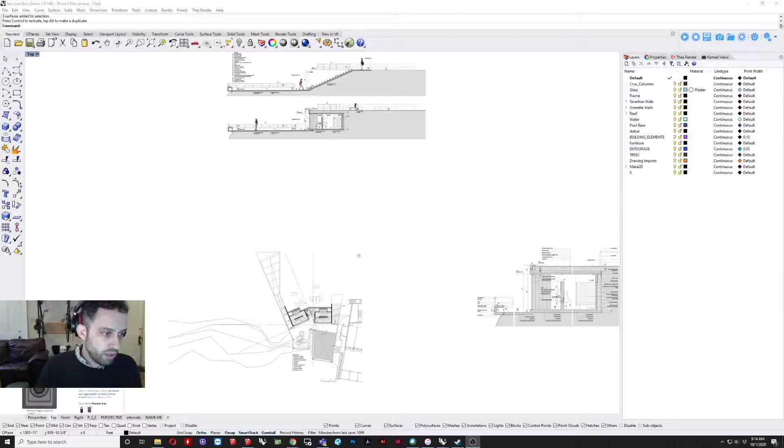So on this one, I'm going to be covering the Baños Públicos project. This is kind of an unscripted thing - I'm just going to go through from just bringing in the drawings to how I would get to starting the process, and try to cover in a little bit more detail each of the things I'd be looking for.

So these drawings are just simply dragged in at this point. They have not been scaled, so the first thing I'm going to do is find the scale on the drawing and use that as a reference. I know that's 5 meters, so we'll scale that one appropriately.

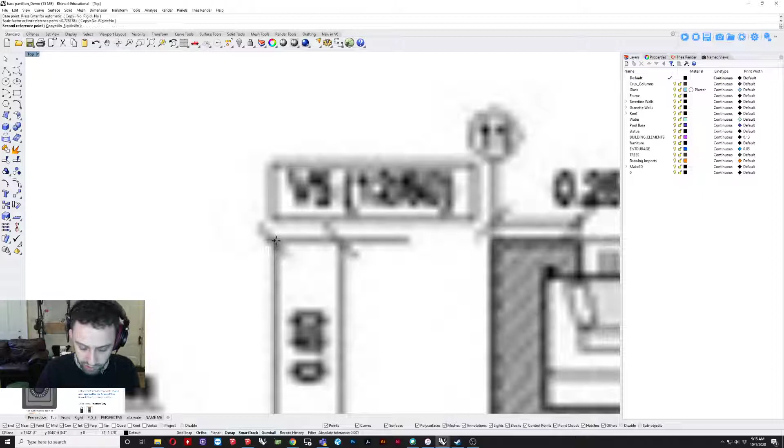These don't have an overall scale on them, so I'll have to use these dimension strings. Fortunately this blow-up drawing gives a clearer dimension string, so we can see that height is 3.13, and that same string is actually on here - it's just too blurry to see, but that's what it says. I'm using this bigger drawing because it has more information, and I'll use the other one as a reference. 3.13 meters, so now those should be scaled.

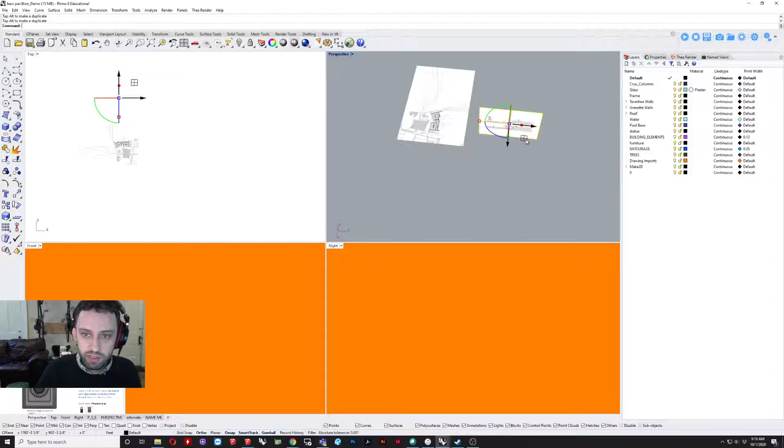And I'm just going to use the gumball here to rotate and get these things to be approximately where they need to go. Let's make the perspective full screen.

So in this case it looks like they were both scaled pretty well, because you can see they line up nicely. Yeah, that worked pretty well - usually I'm not quite that accurate, so I'm happy with that.

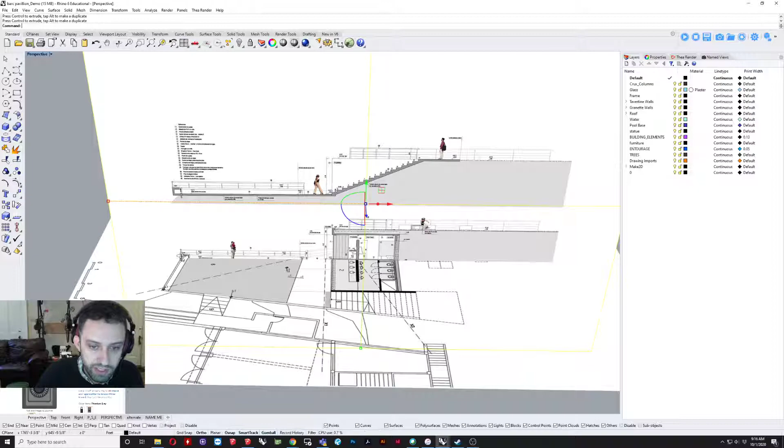And you can see here, since there's an angle on that ground plane, that actually helps give us an indication of where this would be cut, which looks to be about right there - because you can see that the length of that projecting balcony space is cut right where that is. So this line should line up the way I have them there.

So first thing, I'm actually not going to worry about the ground for the moment. I'm just going to worry about drafting this guy.

From a top view, so I'm going to go to a top view and I'm going to turn on polyline, and make sure my Project is on - this little button down here. This is going to be very important.

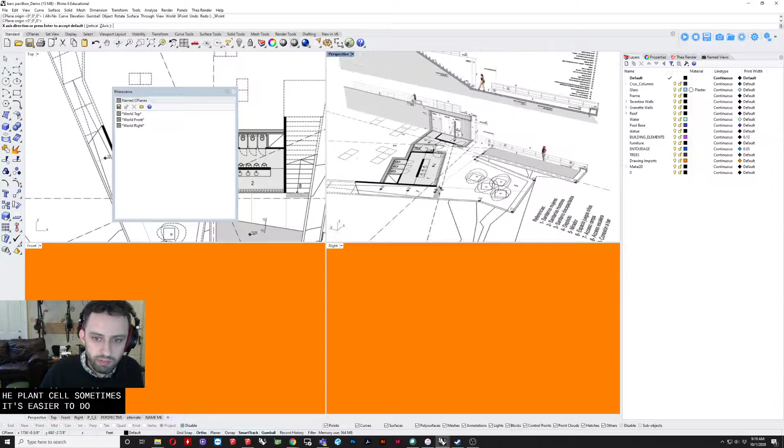Actually, I think that's probably the wrong one to do. All right, so I was actually correct. The way to do this is we're actually just going to type in the command CPlane, and then I'm going to click the 3-point, and I'm going to work actually in the perspective view for this because I find it easiest to see the different planes.

I'm going to click, actually I might go back and forth. I'm going to click on a line that I can sort of follow that I know is on the axes I want. So I want this sort of rotated axes. And again, you don't actually have to do this, but it will make your life easier. So click twice, and essentially, now if we draft, we'll draft completely perpendicular to that.

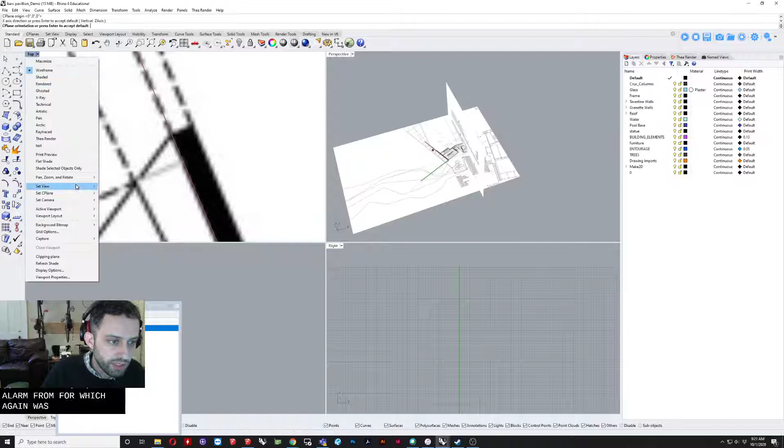So I have this little panel up from before, which again was the named CPlanes panel. And I'm just going to hit save and name this rotated plane. And now, if we click on it, it should go to that rotated plane.

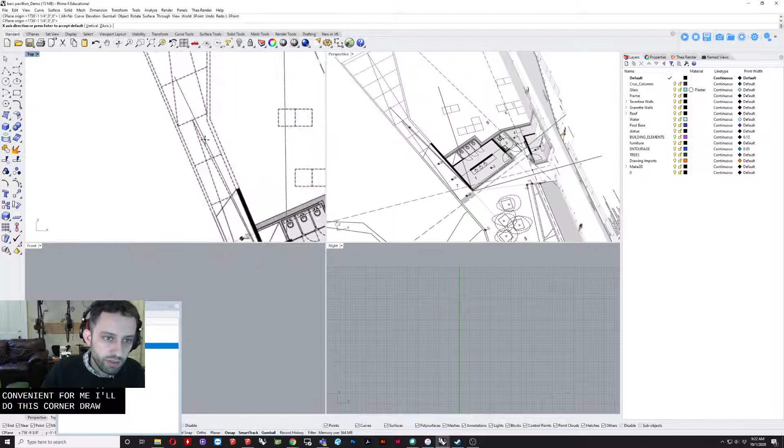So actually, I didn't quite finish the command. So let me try that one more time. So I'll just do CPlane, and I will do 3-point. Again, switching between views to find the one that is most convenient for me. I will do this corner, draw out one of the axes, hit enter. Okay, so now our CPlane should be here.

We can't see it because this guy's here, but maybe if we turn that off, oh, these are not on the correct layer, so I'm going to select these two and put them on my drawing import layer. Now if we turn it off, you can see there's my CPlane. Okay, so now we want to save this, and I'll save over that guy. So if we turn the plane off, we could see my CPlane is currently here. If I do the original world plane, it should disappear and go back to where it originally was.

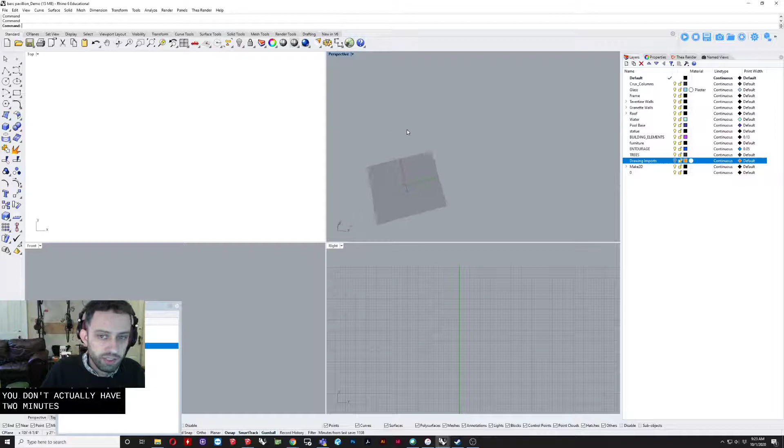Now, generally, you want to model near your original World Top plane. It's just good practice, but you don't actually have to. And as long as you're not too far away. Rhino starts to get real weird if you go like miles away from the original CPlane. It just starts making some errors happen.

So I'm going to keep this guy around because when I draft, I want to be able to draft into different planes. So as I go back to Polyline now and start drafting, I'm going to make sure my ortho snap is on. And as long as I'm on the correct plane, which I now just double click this guy, you can see that it's automatically snapping to that. And that's going to make drafting here a lot easier.

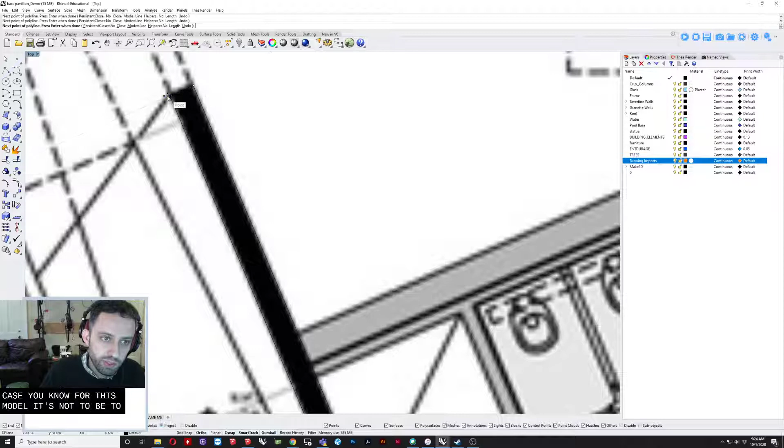Now I'm not going to worry too much about the exact widths of these walls. If I were modeling this for a professional office or something, I might be a little bit more concerned. But in this case, for this model, it's not going to be too important. Now, what I am going to try to do is keep things consistent. So this wall here, I'm actually going to try to make sure that I model the same width. So I'm actually just copying this across.

Now, I probably should have modeled that all as one wall and not cut out the doors. But at this point, it's not going to make that big a difference. And I just did it. So I'll come back and I'll do the other one the other way, not cutting out the doors as I've shown here. So again, just kind of following the lines. And since these are drafted separately, you can see that they have different poches to them. They're different layers of construction, so I'm just going to model them separately.

So down here we have our snaps. If you turn on Osnaps, that's where you get these things. Sometimes it's good to sort of mess around and see which one of these work for you. Center can be really useful when you're working with circles, but it also finds the center of everything. So I usually end up turning that off because I just end up finding it annoying.

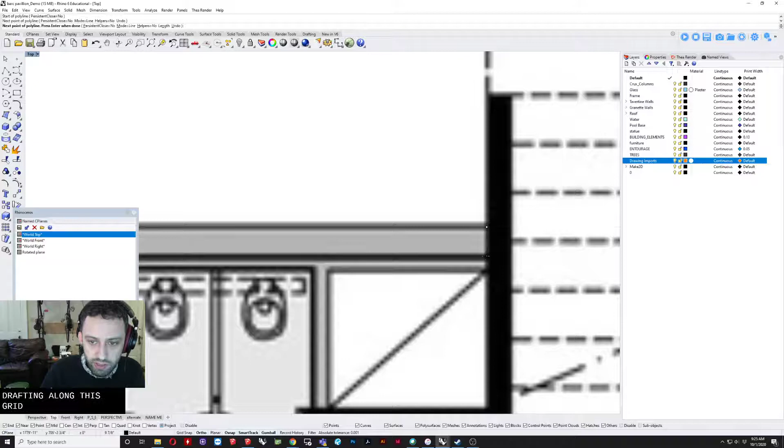So now we're at a point where we're actually switching grids. So I'm going to double click on my top grid and continue. So now I can be drafting along this grid. So there is going to be a bit of back and forth as I go between the two grids, but that's okay. And again, it does want me to finish what I was drafting the first time, but that's okay.

So we'll come back, and you can see here, if I pull this straight, I would actually end up missing. And if I do this, I will be off axis. I'd rather keep things perpendicular, so I'm actually just going to pull it straight and move this curve down to match, because I want those to be perpendicular. I care about that more than those exact alignments.

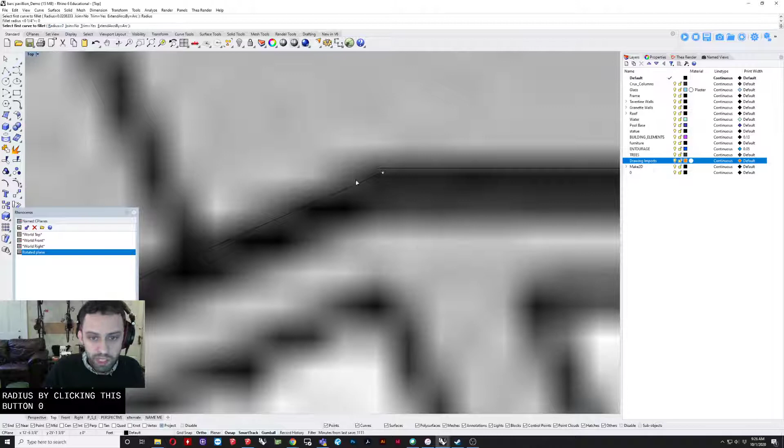And then I'll just use the trim command. Actually, no, I will do the fillet command. So fillet with a radius of 0, which you can set by clicking this and putting 0, will actually just connect two lines where they would end up connecting. So it extends them or trims them back, which can be really useful.

So now I'm actually going to finish out this curve, even though it was on top of that other curve, because I want this to be a full shape in and of itself, a closed polyline. So now I'm just going to select, make sure I can't select my background layer, so make that locked.

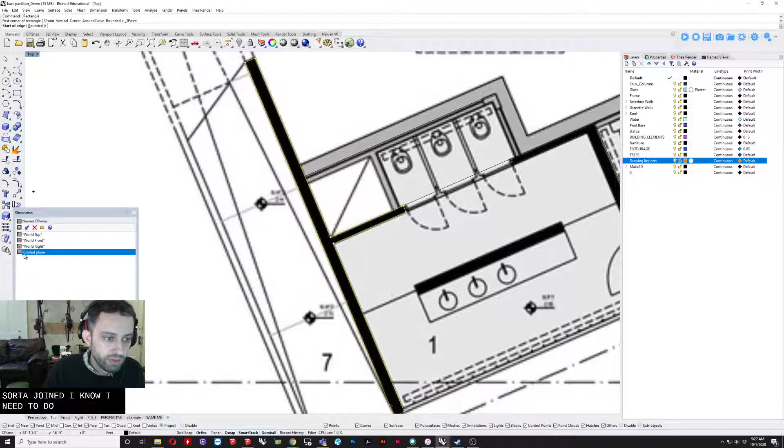But I am going to select all these lines that I just drew, and they're disconnected lines right now, but because their endpoints are the same, I should be able to just type in join, and now they are joined to one closed curve. And I'm going to do the same thing for all the others. So that's already joined. That's already joined. I know I need to do, let's see here. So I need to do this.

This is a low wall, which fortunately the section will tell me about exactly what that height is. And I'm not going to draft my curtain wall and door that I have right now, but I'll come back to that. I am going to get this sort of what would be called like a fur out wall. You can see it's a separate wall adjacent to that first wall.

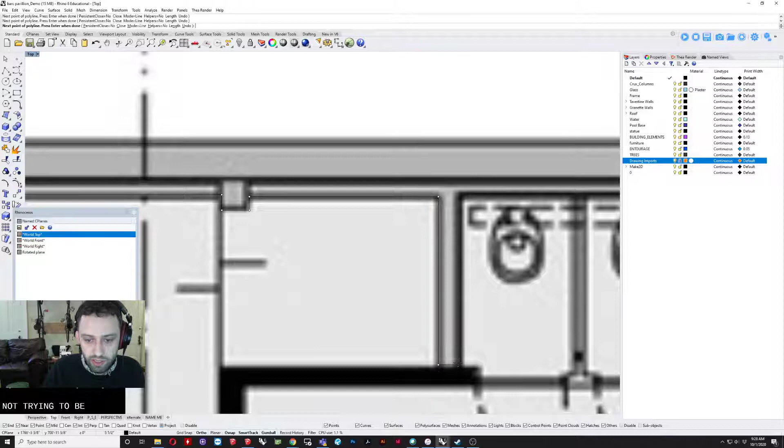And I currently have the SmartTrack on, which allows me to make those sort of adjacency snaps, which is very convenient. And just switching back and forth between grids. I'm not trying to be hyper precise, but I can be close enough. I'm not going to do those walls as part of this because those are little partition walls. And again, just using the SmartTrack to connect things where possible.

And I do want, so I'm going to have to follow the same curve, which is fine, because I want to make sure that I can make this into a closed polyline. So now I should have these two curves that I can join. And let's see, I'll do this guy now. So it's a lot of repetitive process with this sort of stuff, especially in this sort of early first stage.

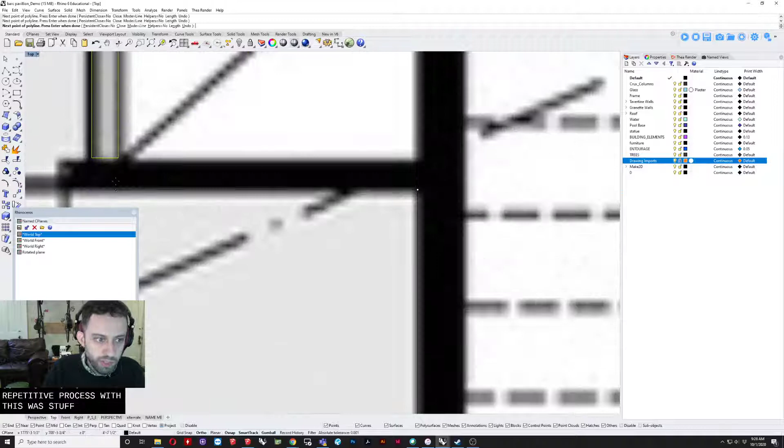Now, as I said, I'm going to do this one differently, so I'm actually not going to cut out the doors. I'm just going to do the full extrusion of the walls, which is generally probably a better idea to sort of keep cleaner modeling. It's something I forgot to do the first time, but I'll do it this time. So again, just keeping my alignments.

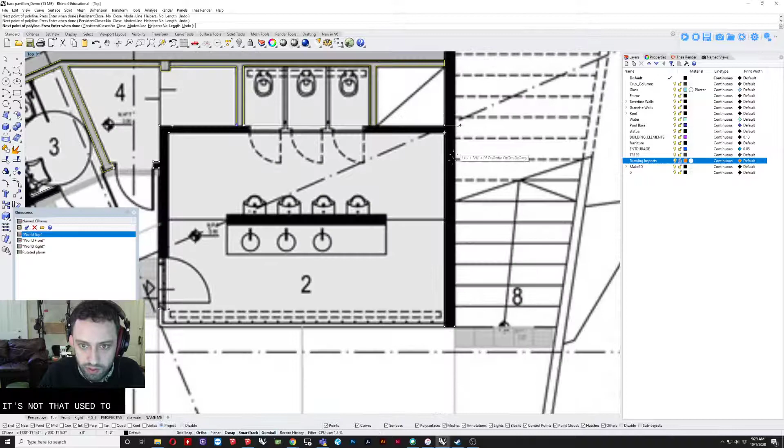Going through, now you can see here that I didn't do this one correctly, because if I pull this across, those don't align. So I will Control Z and make sure that I use that as a reference and pull that all the way across. And snap these to, oh, it doesn't finish that way. Gotta go the other direction. All right. So I think I've done most of the walls at this point. Now again, they're just 2D drafted, but that's kind of all I need to do initially.

So if I'm smart, I would start making some layers here. So interior walls, and let's do an exterior. And that's just going to help keep me organized as much as possible. So these little fur out walls that I called here, I'm going to put those on my interior layer. And I'll make that some color that I can recognize, a nice blue.

And then all the walls that are sort of these exterior walls, I'll put on a separate layer. And you can find your own organization. It doesn't have to be exactly this, but keeping organized is, of course, always a good idea. And we'll make that a nice color too. Oops. We don't have two things selected at once.

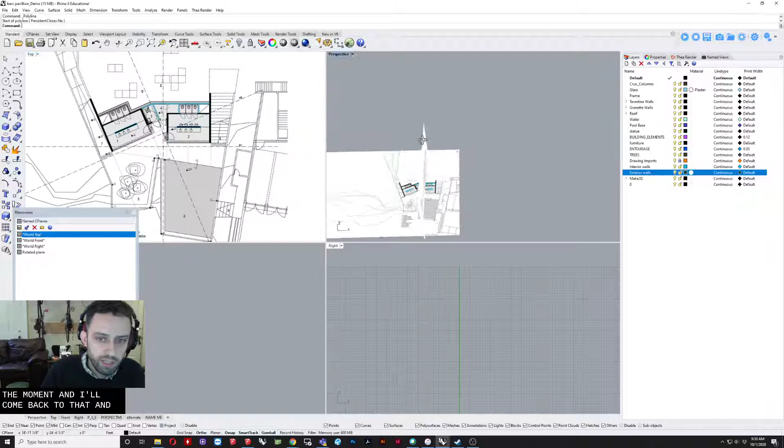Okay, so I think I have enough drafted for now. I will hold off on doing the landscape for the moment, and I'll come back to that. And the landscape is really just those sort of platforms. So using the section, we can actually get all the heights of these things. So we know that, let's go to a side view.

We can basically just select the things we want to extrude. So I'm going to select these interior walls here, as you can see, and do extrude curve. And I want to make sure that solid is set to yes. That'll just make it so that they're already solids, and just align.

Now, if I were being real precise, I would figure out what those numbers are and actually make them exactly that. But it's not going to matter too terribly much, because again, we don't have to build with this, and the drawing's a little blurry.

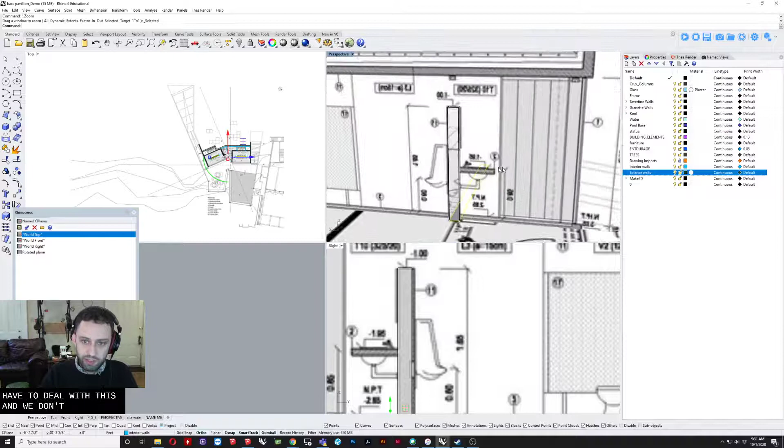Now, I might have made them slightly tall, because if you can see here, I didn't perfectly align my section the first time, so if I want to use those for reference, I actually want the ground plane to align. You can see that corner right there. So these guys I might want to just shrink a little bit, and I'm just going to use the Scale1D command and just scale them back just a bit. There we go. So now those should be pretty precise.

So this back wall, which appears to be the brick wall in the project, I'm going to do extrude curve and pull that out. It looks like it actually finishes right before the ceiling plane, but we'll do it that way. And now the exterior walls.

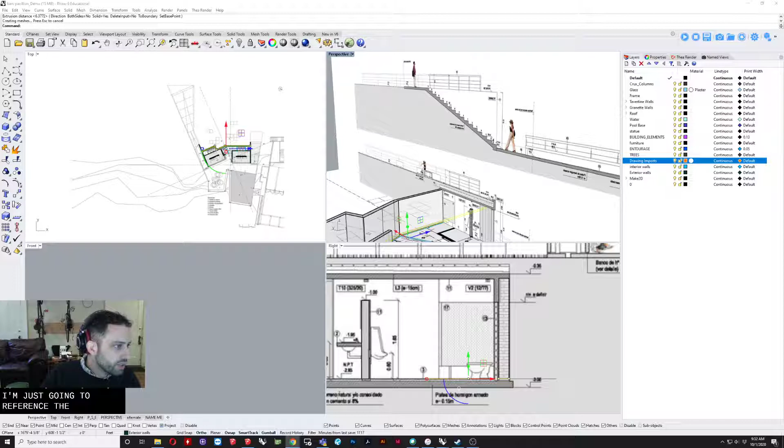So this is where we might not have enough information in these sections alone. It does appear that they go the full height, but I'm just going to reference ArchDaily real quick. So if we see here, there's a separate pour here for the concrete, but these walls basically go the full height of the interior, and then there is a separate pour that is functionally the same wall sitting on top of it. So I'll actually model this as two pieces just to keep it simple.

So basically all these little black walls here, I'm going to extrude, and I will pull them up to, I guess, the same level as that exterior wall that I already did. And I'm just going to reference it. So that is a majority of my walls, actually.

I need to build a floor, a ceiling, and that upper wall. So for that upper wall, again, I can use that photograph to see that it just follows the outside perimeter of the building, and it looks to be maybe 2 feet tall. Obviously, it's in meters, but it's a pretty simple shape. So I'm just going to draft that out now. Again, I'm going to turn on projection, especially now that I have 3-dimensional objects, and just follow the outlines.

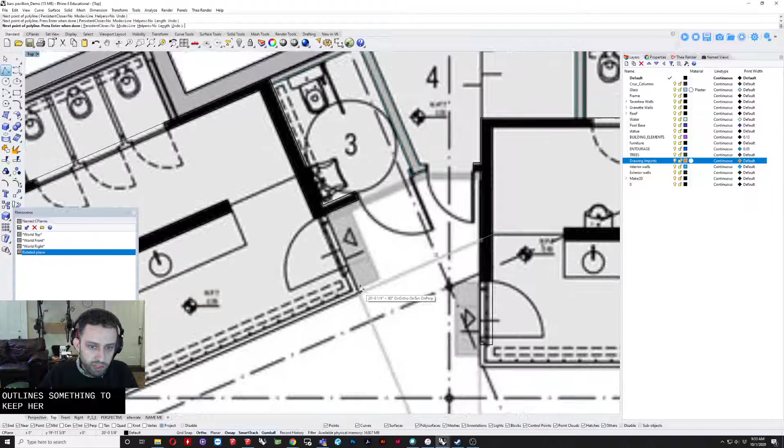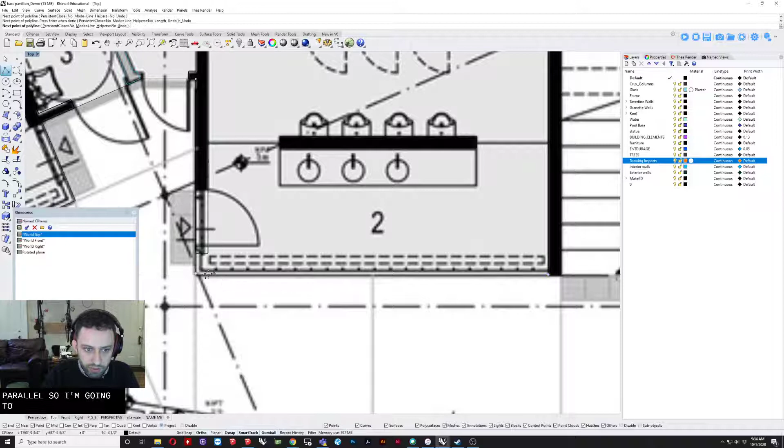And so I'm going to keep rotated plane on, and just rely on my snaps. So it looks like that wall didn't actually snap where I wanted it to, but that's okay. I'm going to go to world plane now. So I want to fillet these two curves with a radius of 0 so they connect. There we go. So again, I'm trying to keep everything perpendicular and parallel, so I'm going to use my snaps whenever possible.

So I'm going to now select that outside wall that I just drafted, and it's 3 curves right now, so I'm just going to join them. So it's 1 curve. I want to make this into a solid, so instead of just drafting the other side, I'm just going to do an offset. And let's see, I'm just going to guess that was 6 inches. Maybe a little bit more. Let's do 8 inches. That seems about right. You can see here it's not perfectly aligning, but because this is going to be built on top of the other one, I'm not too worried about it.

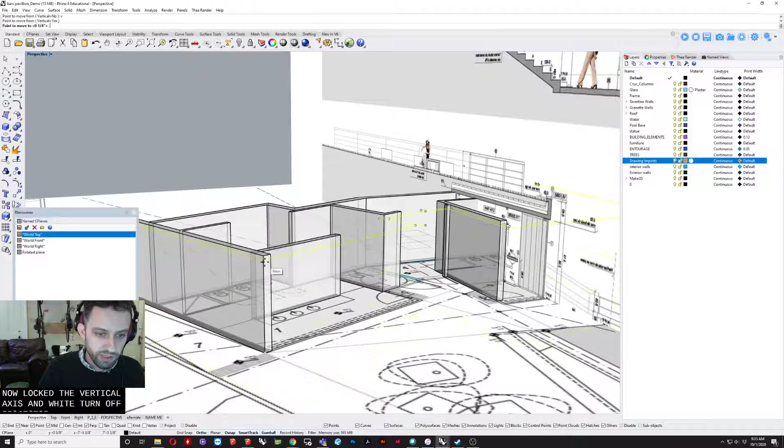So I'm going to go back to perspective, and I just typed in move and then V. So you can see here, it's now locked to the vertical axis. And I want to turn off project, so I can bring this guy up. So now that profile is sitting on top of my other walls, and now I can extrude it up, and I'm going to go back to the side view so I can get the height right. And there we go. So that's that upper cast concrete low wall that's retaining the grass and the roof.

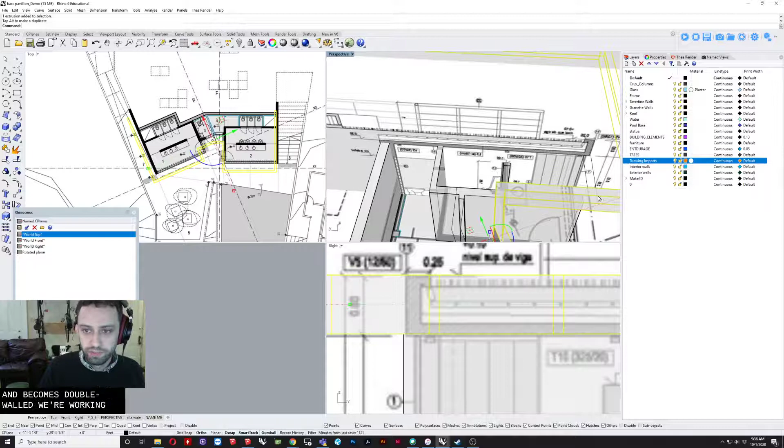So now let's build the roof. If you look at this section, it will tell us how the roof functions. I'm going to just move this for a second. You can see here, basically the roof is one continuous piece that then wraps up and becomes the little wall that we're working with now. So I'm just going to draft where that would be. So it's going to be on the outside perimeter.

And now that I've already drafted these walls, actually I'm going to start over and make sure project is on. Again, whenever I'm drafting in 2D, I really want to have project on. Otherwise, I'm going to be making a non-planar object as it snaps to different walls at different heights. But I can just move around the model and use the snaps and make this go pretty quick.

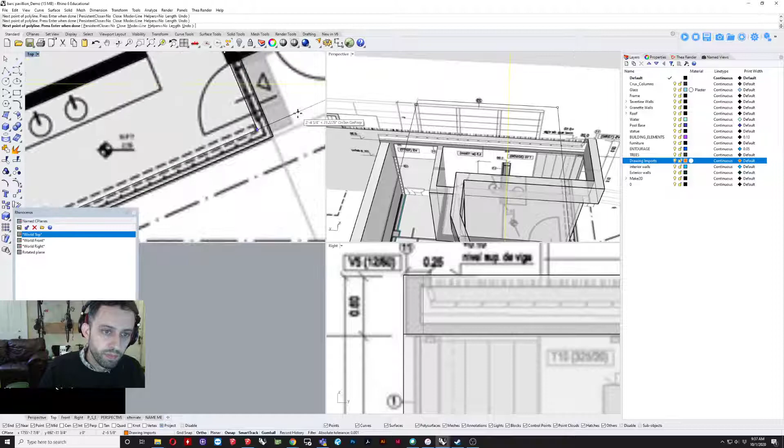Okay, so again, I want to lift this thing, turn off project. And now I can do extrude curve and give this guy some thickness as well. So again, looking seems to be about that. So now I have a roof. Now it's a green roof, so it has some membranes and other layers on top of it. For now though, I'm not gonna worry about those. I will come back to that.

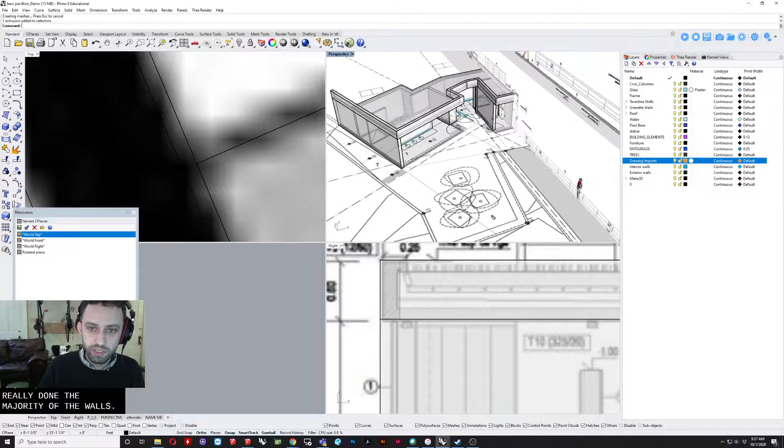So I've really done the majority of the walls. I can actually probably just copy this down. This is actually probably the same shape as the floor. So I'm actually just going to kind of cheat a little bit and do that. It'll at least be close enough for now. And there's of course an exterior floor versus an interior floor.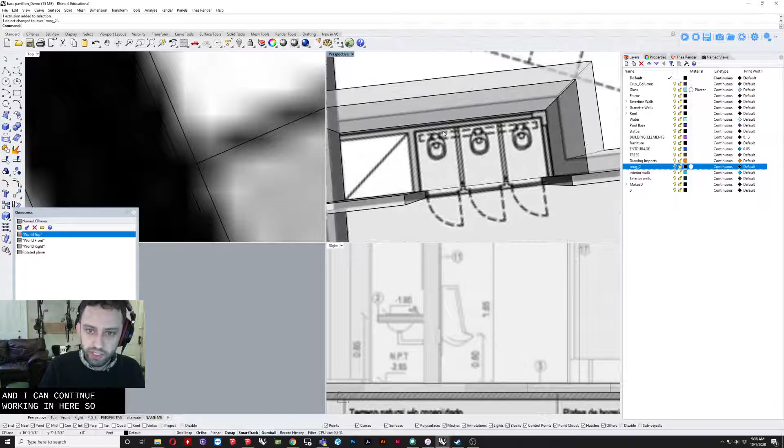So I should probably make a roof. Oops, so it's already a roof in this model. I'm just going to make a separate one, roof 2, spelled excellently. Mostly because now I can turn that off and I can continue working in here. So it looks like I missed the wall on the interior here. So of course I will come back and fix that.

Again, turning on Ortho and or turning on project and going to the correct C-plane so that I can snap to the axes I want. Again, it will help tremendously to keep things perpendicular, and that will really make the drafting look detailed and appropriate.

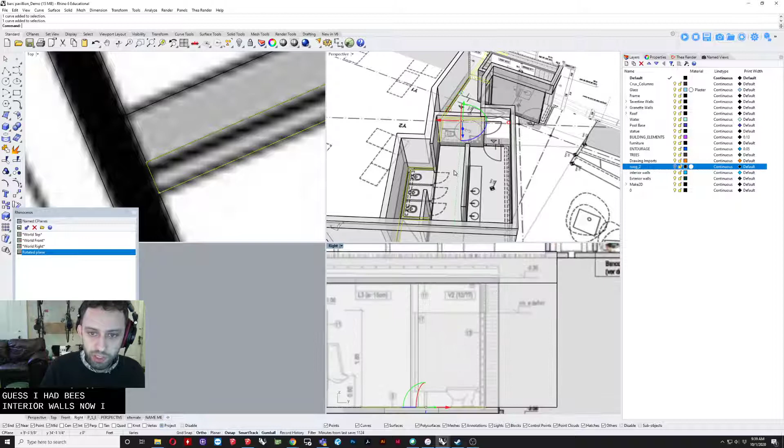So the more you draft, the nice thing is the more you just have snaps, other walls and lines that you can just snap onto, which means you can go a little bit faster and you don't have to pay quite as close attention. So I guess I have these interior walls now, which seem to go up to the ceiling as well. So I'm just going to extrude them up. And of course, turning off project. With project on, they just wouldn't go anywhere because they want to snap to the C-plane, and the C-plane is what they were drawn on, so they can't actually get any taller.

Now for these partition walls, if we look in the section, I'm going to pull this up for a second, we can see the partition walls are sort of half height. They go nearly to the ceiling, and they are lifted off the ground. So if I wanted to do these nice and detailed, I would also come back in, and I'm actually only going to do this once, and then I'm just going to copy it because that will be tremendously easier. So I just made a nice little rectangle there.

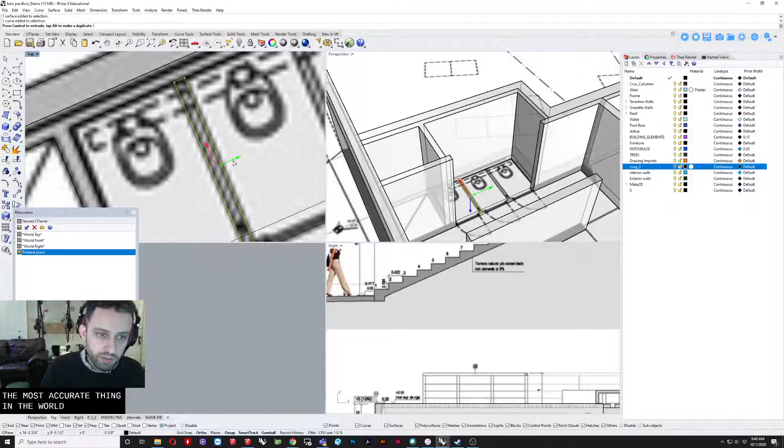Oops, you can see this is why you need project, because otherwise you end up with weird snaps like that, and that will not work. So project is on. Again, not the most accurate thing in the world. We'll shift that over. I'm not really going to be too worried about that.

And now we're going to go to our side view, and I'm going to lift this up to where the stall height begins. And now I will do an extrusion and bring that up to the top. And now I can just copy this guy. And I'll want to do the same thing here, and I would do that separately over on this side because it's on a separate axis. So instead of trying to rotate this, I could, but it's easy enough to just redraft that. I'm going to skip that for now.

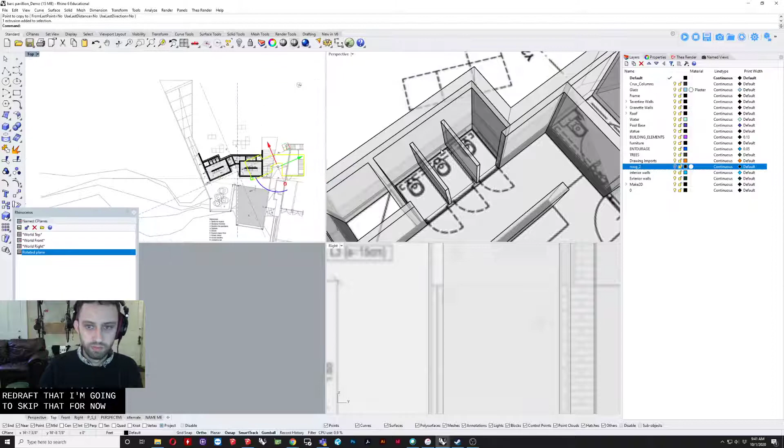What is this? Oh, looks like I accidentally copied my roof and or floor, put it somewhere it didn't need to be. So I would also probably want to do the fronts of these the same way. So I'm actually just going to, again, make my life easy, take the wall that's here. I'm going to do a rotation command and either hit C or click in the upper left-hand corner. And now I'm just going to rotate. So now it'll give me a wall that's the same height and the same thickness, just because I don't want to have to draft it twice.

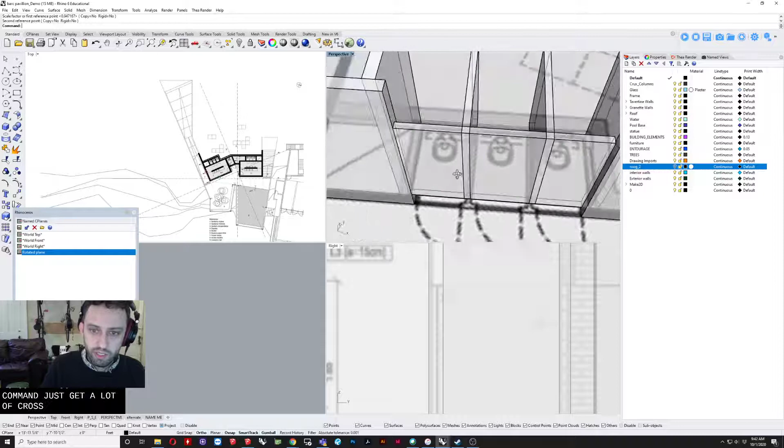And I'm just going to use the scale 1D command to scale that across. Now that's not super accurate because it does need to have some cutouts for the doors. So I will just quickly figure out what the doors would be. So it looks like that's about the door.

And just make that a bit bigger. And now I'm just going to copy that because I'm going to use this as a Boolean. Again, you could have done this differently. I did this a more complicated way than I probably needed to, but you know, the great thing about software like this is there's about 1,000 ways to do everything. So you're not necessarily wrong if you do this differently than I do.

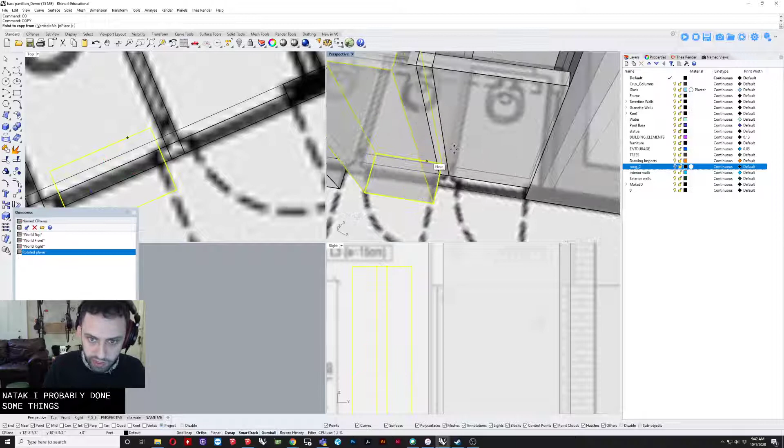In fact, I've probably done some things pretty silly in my modeling process just now, where I could have been more efficient or just could have done a better job at it. But that's okay. I'm going to end up with what I hope to be a pretty good product, and that's all I'm really worried about. So we're just going to do a Boolean difference and subtract out, and I'm just going to take these, so now they're one object.

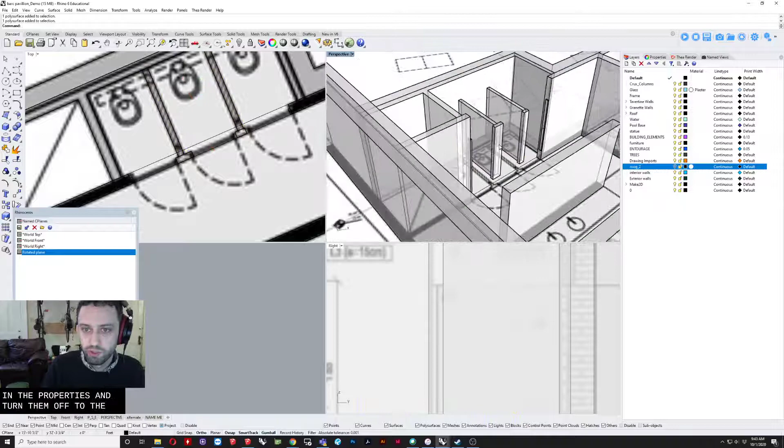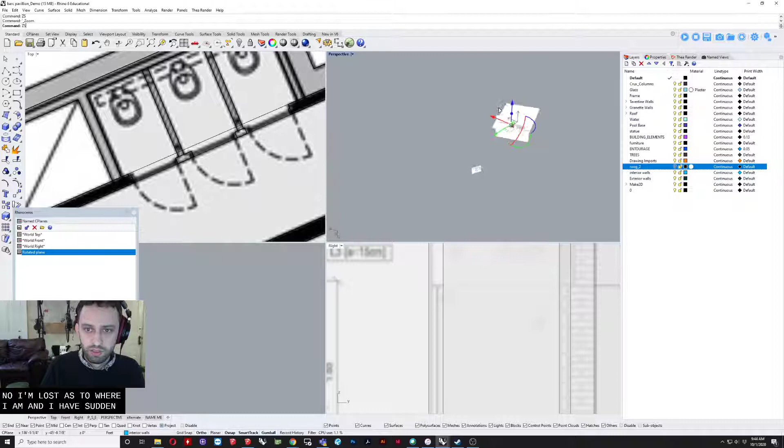Now I'm lost as to where I am. Am I upside down? Sorry if I've gotten everyone car sick just now.

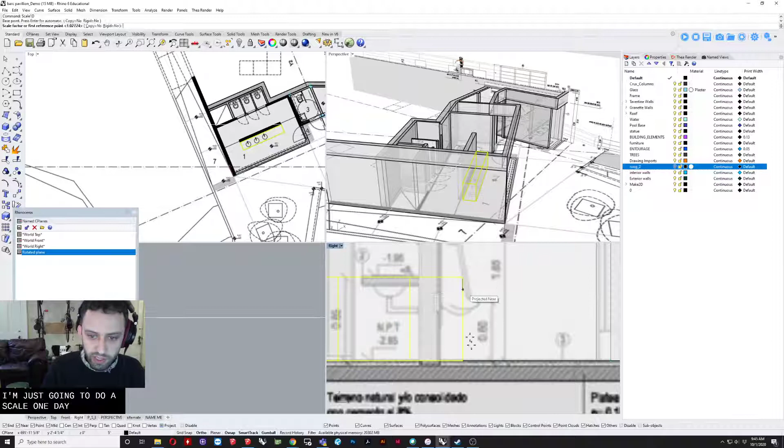Anyways, so I'm just going to, again, use the rectangle 3-point, which is my favorite of the rectangles. Actually, I'm going to do this the other way. I'm going to do an extrusion, a 3-point box. Because it's such a simple shape, I don't really need to worry about drafting in 2D first. So I'm actually just going to extrude it up, which is going to make it way taller than necessary, you can see here, but then I'm just going to do a scale 1D and bring it back to be only the height I need.

So again, I've got most of the things done at this point. I guess the next thing I'll do is, I think, one of these is a stair. So this guy's a stair. I'll model him real quick. I don't know why he has a male identity, but that's all right. I'm going to go back to my world plane because it's on that axis. And it seems the stair goes all the way to here based on these lines that we have. So I want to make sure all of my steps are the same width initially, and then I'm going to cut them back because that's going to be a lot easier.

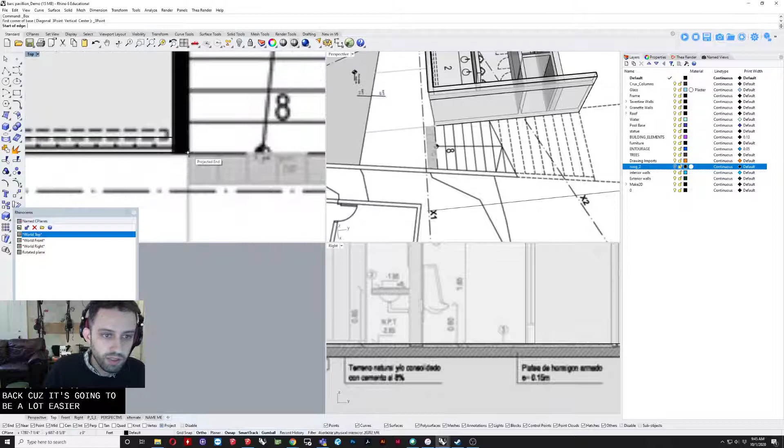So I'm just going to use my snaps. And do we have a section? We do have a section that gives us the heights, which is going to be convenient. So we could try to figure out what they say, or we could snap to them. I'm just going to actually draft this guy and then bring it up so that I can try to match its height to the image as best as possible. Scale 1D, of course. I have project on.

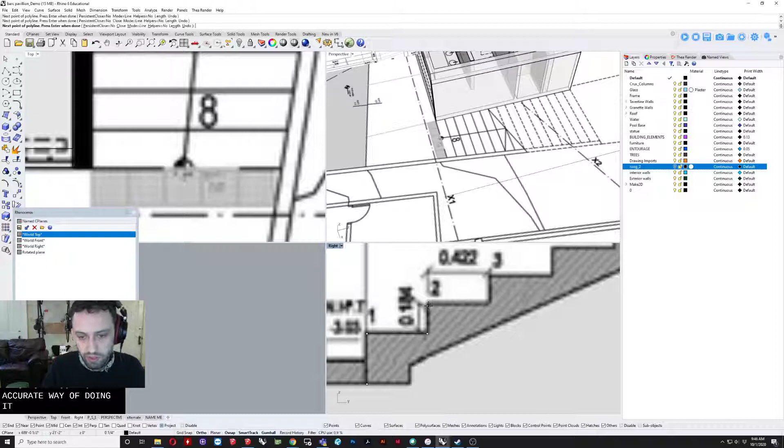Actually, you know what the better way of doing this would be? Instead of doing what I just did, I'm actually just going to trace this profile. So again, I have project on. This is a much more accurate way of doing it. However, try that one more time. So the weird thing about project is since I'm really far from, I want to make sure I'm on the correct C-plane. I am on the correct C-plane. It's going to draw on the original C-plane, which is over here somewhere. So whatever I drew is really far away from that, which is kind of inconvenient, but I'll just remember that and come back to it. This is why you want to always be modeling near the C-plane, so as you're drawing things, they don't appear really far off in the distance.

But I'm actually just going to draw one stair, and I'm drawing one stair for a very particular reason, because I want all my stairs to be the same, and if I were to just manually draw each one, I probably wouldn't have them all be the same. I would probably not be successful. But then I'm going to use the array linear command, and it looks like there are 17 stairs. I already drew 2, so let's try 15.

So we can see here, didn't quite get it right, but that's okay. Essentially what we're going to do is, it looks like I need one more of these. Kind of hard to see right now, but that's okay again. Take all of them, and I'm going to join them.

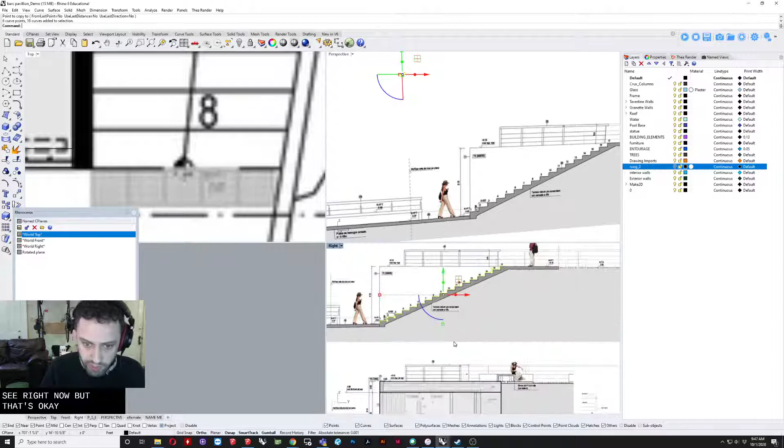Now I'm going to do the scale 1D command so I can make sure these are as accurate as they can be. I know I want that face to align, so I'm just scaling it in this one direction. There we go. Now I'm going to scale in the z-axis, again using the reference points of what I've already drawn.

So this is where sometimes you have to turn off Smart Track because it wants to snap the things you don't want it to. Anyways, so I got that now. That's just the top of my curve.

I'm going to need to draw the underside real quick, so I'm just going to come back. Don't have to be as precise about this because this is actually all underground concrete. And if we're honest, concrete is really never accurately poured like this. I mean, it's poured, but concrete is a fluid material, it's really difficult to be perfect, so it's always a little different than it's originally drawn.

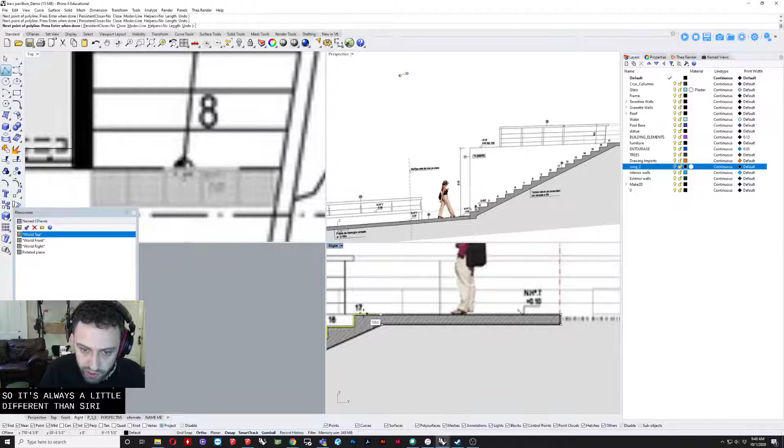Okay, so we should now have the components to make a closed curve. I just hit J and then hit enter, which would join the curves. So now it's one closed curve.

Since it's way far off in the distance, I'm just going to pull it back over, and I'm going to go to my plan so I can align this thing. I still have project on, so I can actually snap to that wall. And now I can do extrude curve.

And again, I want to extrude the full length. It's a little bit bigger than I need, but that's okay, because I'm going to now trim it back using the booleans.

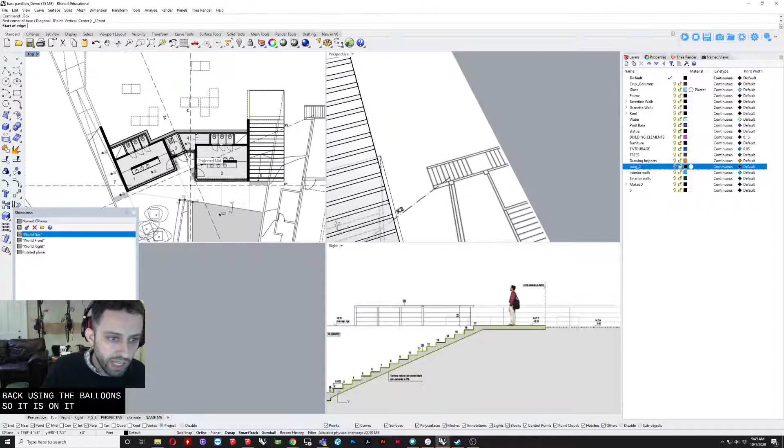So it is on its own axes, but that's okay, because it seems there's stuff over here on that axis, but I'm not actually going to worry about that stuff. I'm only going to be worried about this one line. You do not need to model anything over there.

You can see here, I definitely have that guy elevated a little bit high, but just take him, Boolean difference. And now I can bring this back down to where it needs to be. So I just want to align it.

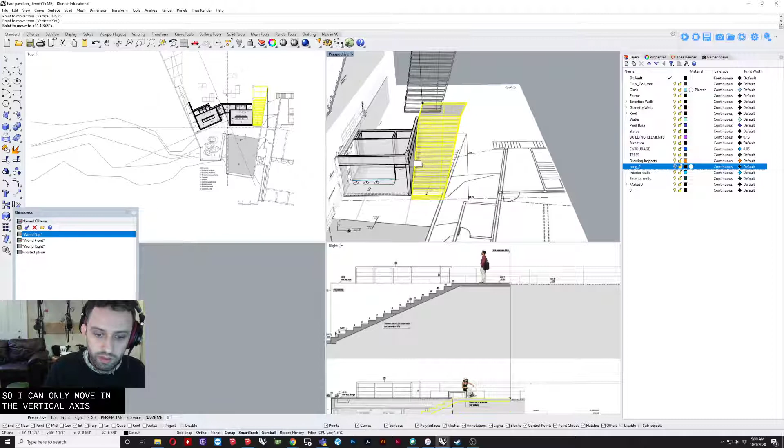Let's see here. Turn off project. Again, I'm hitting V so I can only move in the vertical axis. And there we go, there's my stair.

Now it does have a wall on the side. I'm not going to worry about that right now. I'm just going to worry about that stair.

So I don't know how long it's been. Actually, I can look how long it's been. In 30 minutes or so, give or take, I've got the vast majority of this project modeled.

Again, I'm going to model what I did in the other demo real quick, and I guess I should show how you would cut out the doors for that piece that I didn't do it that way. That's probably, I'd have to look at the photos to see if that was accurate for the stalls, because I think the way I modeled the stalls in the other one is probably more accurate. But I will at least cut out this door.

I'm not going to do everything for this project. I'm just trying to get through a lot of the basics.

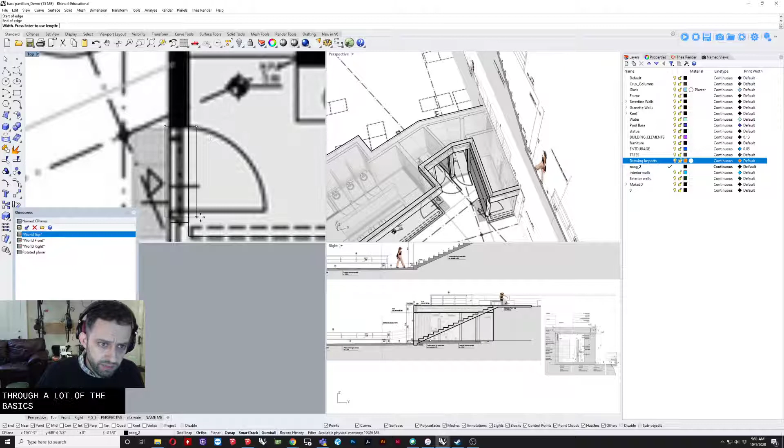So we'll want to, for things like this where we don't have an exact reference, we'll want to look at the photos again and see if we can figure out how high that door goes.

There we go, so you can see the door is the full height of that wall. So that's good to know. So actually in this case, I don't really need to cut out a door.

I'm just going to use the move face command and move this, nope, not that face. That face. And move it back, because we could see from that photograph that that wall really ended. It didn't continue on the other side, that's where it transitions to the glass wall.

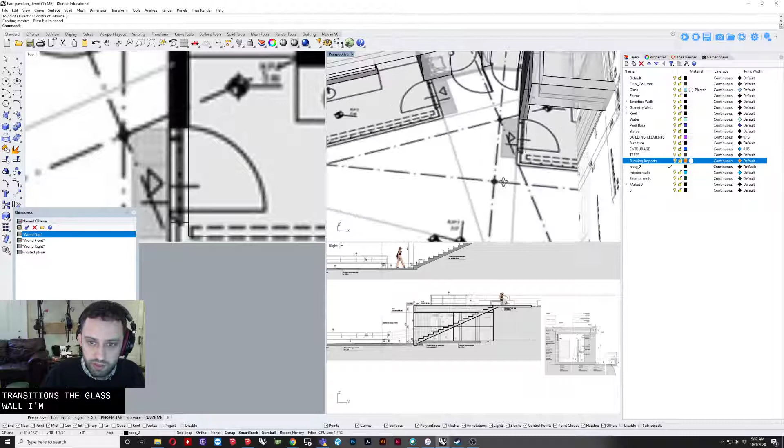So let's do that glass wall one more time, which I did in the last video. These things here, I'm guessing are, I can't really tell what that is, so I'm just going to make an approximation of that glass, which really will be fine. I'm just going to guess it's 8 inches by 3 inches.

I want to make a nice little C shape.

And I screwed up and I actually put an extra point on this. I'll turn that off.

Again, join those profiles, then I'm just going to do a quick fillet. This time my radius I'm going to set to 1/4 inch. So fillet can join things together or it can round corners. A fillet with radius will round a corner. A fillet set to 0 will just tie things together.

So I'm now going to do an offset, and I want it to be set to have a flat cap, and I want the distance to be set to 1/4 inch. And there we go. I now have a profile.

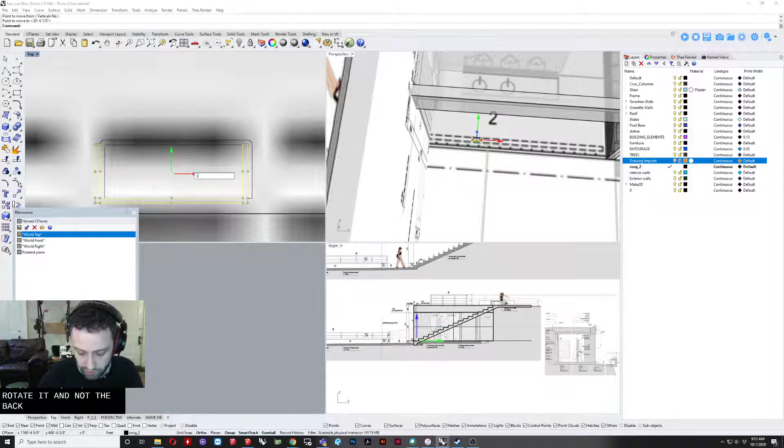So I'm just going to copy this profile, rotate it, and snap it back. And since I know I need to have a little gap here so the next piece can fit in, this will basically be my little curtain wall that is the channel glass.

So I'm just going to set this to be channel glass, bright green. I'm actually going to give it a material real quick so that it appears as transparent in some other views. Not too important right now, but just a quick thing on how to do this. So this already has a bunch of materials in it because I keep making things and importing stuff.

But I'm actually just going to go and name this glass and select the glass material. Now you can use that same material again. So anything on that layer, which I'm going to set this to be on that layer, will then automatically inherit that glass material.

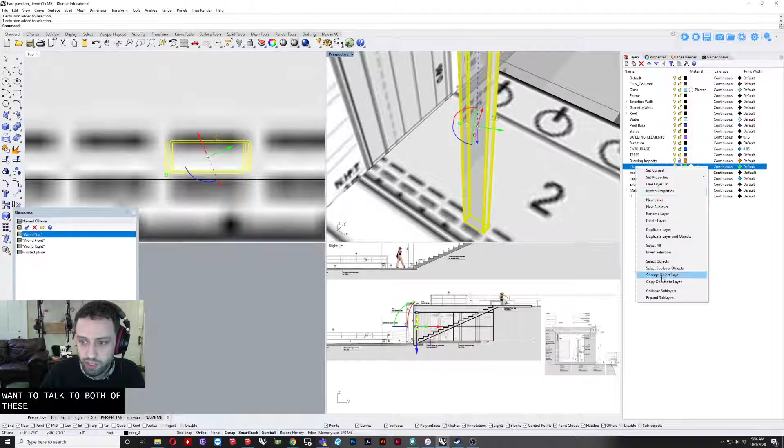So I'm going to select both of these, put them on the channel glass. Now I'm going to make them into a block just by typing block. It'll ask me for a base point, which I will set as one of these corners. Channel.

And now I can array this thing so I can get my full wall of channel glass, just using the snaps that are here until I get the snap the way I expect it to.

So I'd want to look again at the photos to figure out where its exact alignment is, especially since the drawings are a little less than perfectly detailed. So this will tell me. It looks like it's set back maybe, I guess, 4 inches or so. So I can use that as a reference. And this looks close enough for me right now.

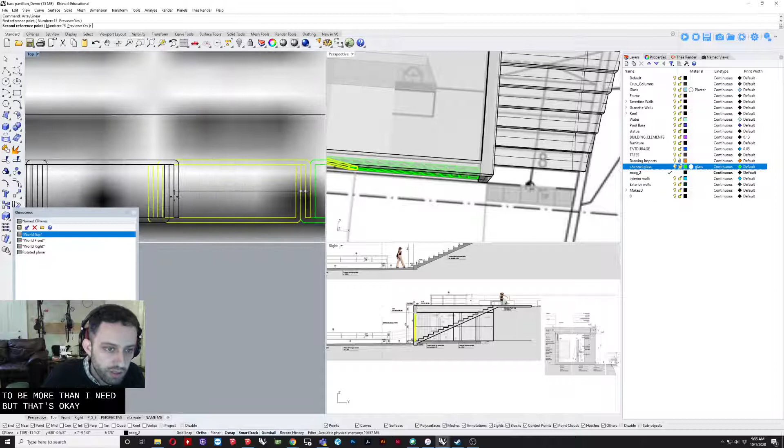So I'm just going to pull it to the side, and I'm just going to array this again. I know 15 is going to be more than I need, but that's okay. Oh, actually, just barely more than I need. So, yeah, that worked out pretty well.

Turning the corner, I'm actually not going to be... There are specific pieces of channel glass that are designed to turn corners, but I'm actually just going to take this guy and kind of be a little loosey-goosey about it and just turn the corner by just turning the block. Again, it's not perfect, but without actually going and figuring out what this specific company's profiles are, this would be close enough.

So there we go, that's my channel glass wall. I'd want to do the same thing over here to get that guy. So for the last thing I'm going to do for this demo, I will probably... So there's a ramp on this side. I'll give you a brief idea on how to do that. And then I'm going to make the ground condition itself.

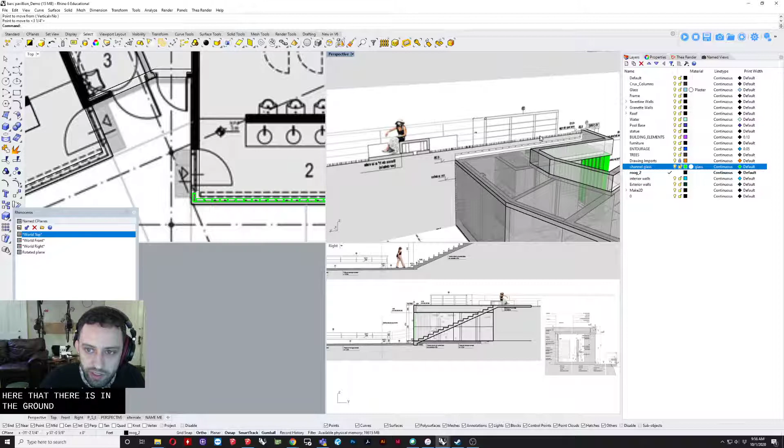Now, if we look in the section, we can see here that the ground extends out over top of, and then there's some other material there. For that other material, it looks like it's the same sort of general shape and size of this guy. So I'm actually just going to copy this first thing up, and again, you can set it to copy on the vertical axes.

So I'm just scaling this in 1D, like so. Now I would probably put that on a separate layer, but that's going to be our ground material that's over top of our building.

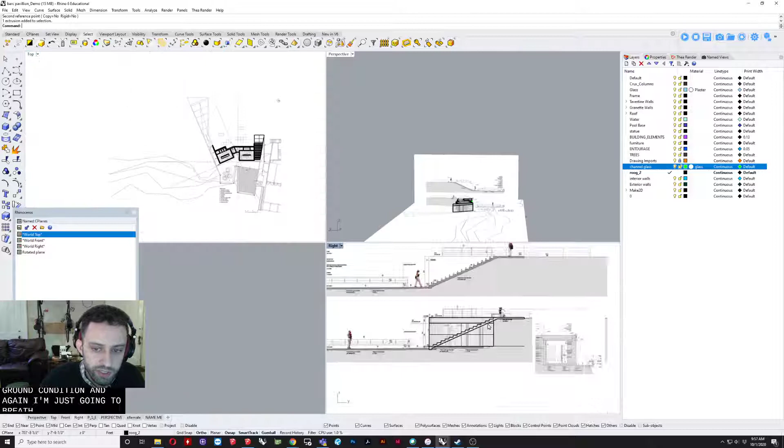So the final thing I'm going to do is make that ground condition. I'm referencing the line that we see here. It's not super hyper accurate, but that's okay. If we were doing this the correct way, we'd want to reference topography data and cut that out, but we don't have that. There's certainly not enough in this model or these drawings to do that.

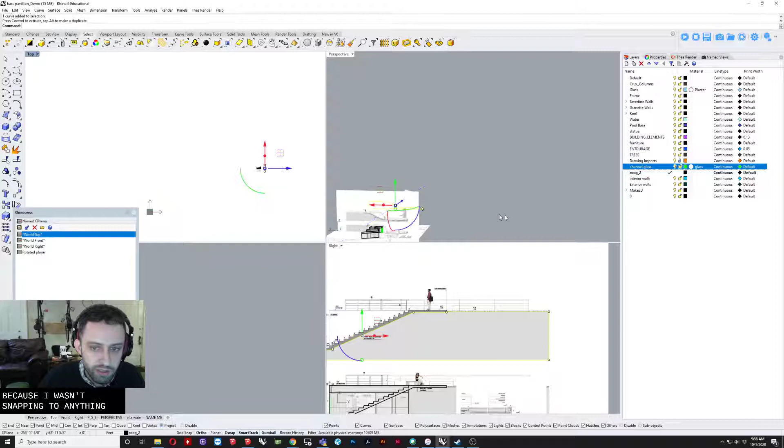So I'm just going to get as close as I can and make a profile. Now I want to make sure project is on, which it wasn't, so this will possibly not work. You always want to be drawing in 2D with project on. But I think it did work because I wasn't snapping to anything—if I had snapped to something, I could ruin this. A good test before starting this process is to type in the command planar surf. If it makes a surface, you know you've kept those lines planar and have no issues.

So now when I copy this across, I'm going to go back to my plan view. You can see here I want to get back on my original world axes, that way my piece updates. It doesn't matter too much, I'll start here.

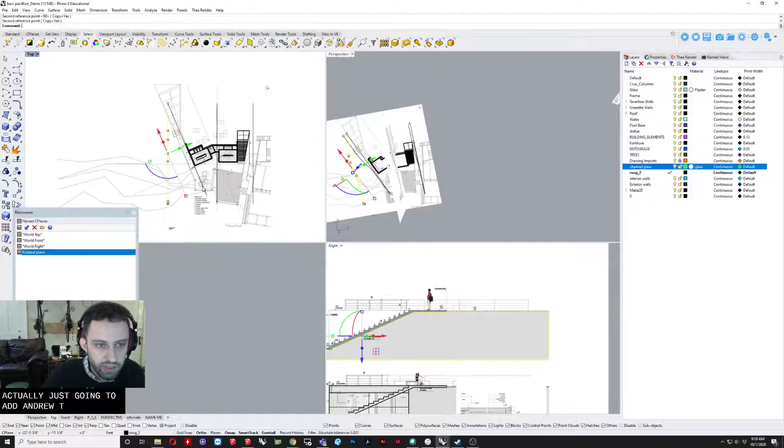I'm going to copy this profile three times just so I can make references of it. I'm going to align—again this is not super accurate, we don't have better data so this is fine. I want to align the last one to my rotated grid, so I'll select that and rotate. We made a copy, and I don't need a copy. This is just transitioning grids, just making an extra one.

Okay, so you can see here I now have 4 curves. I wanted at least 2 on each axis, that way there's a bit of an extension—it doesn't just turn the corner. I will now do a loft command, and those lines should align to one another. You can see they're not right now.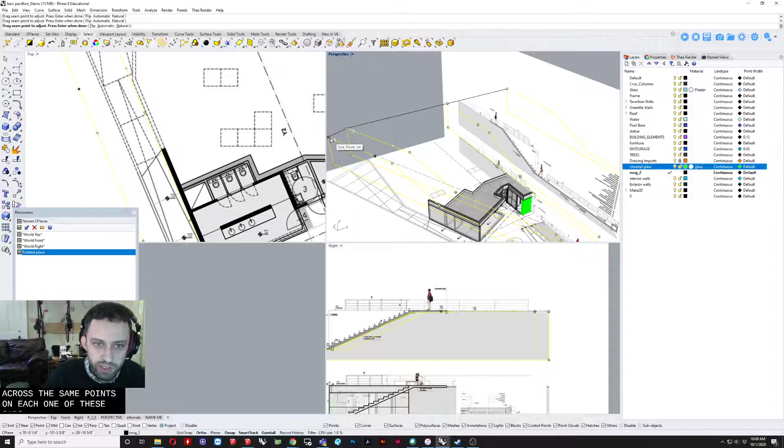So if we do this, it's going to be all kinds of crazy. We want to hit loft again and just pull these back so that line makes a straight line across the same points on each curve. Usually it's pretty good about guessing which way it should go, but it's not always perfect, so you can try any of these and see which looks best. I think I'll do loose. Again, it's not super accurate because we don't have actual topography data.

And then I should be able to hit cap, and as long as those curves I started with were planar, it should remain planar and be able to be capped. Okay, I'm just going to select everything there and unselect the surface so I can get rid of those curves, just because I don't want extra curves in my model.

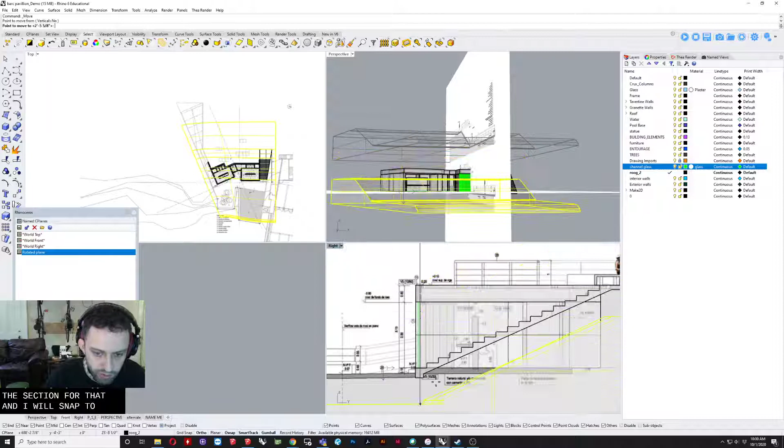And now I will bring this down. I'm going to use the section for that, and I will snap to—there we go. Now of course this currently has the surface going through my object, so I'm going to want to cut that out. Again in top view, I'm just going to come back and draft where I need that surface to be cut out.

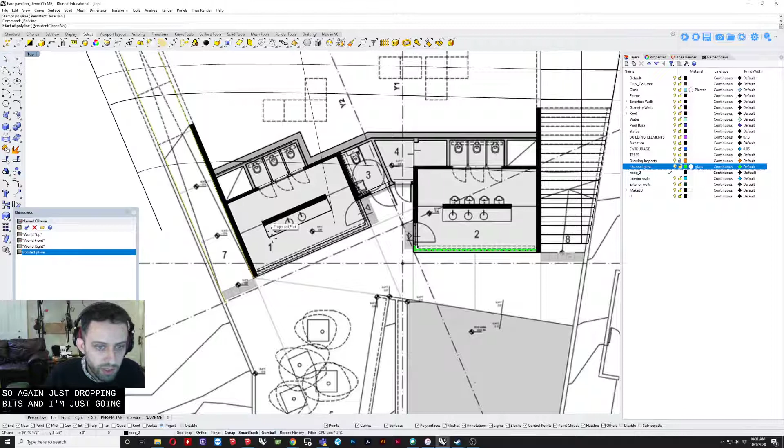So let's just do the whole ramp, because I don't know how far the ramp is underground. Again, just drafting different bits, and I'm just going to join them together. I actually did this first line wrong here. I really want to be drafting on the outside of the building, because I want to make a clean cut that pulls back the earth on the outside, so my walls and earth aren't colliding with each other.

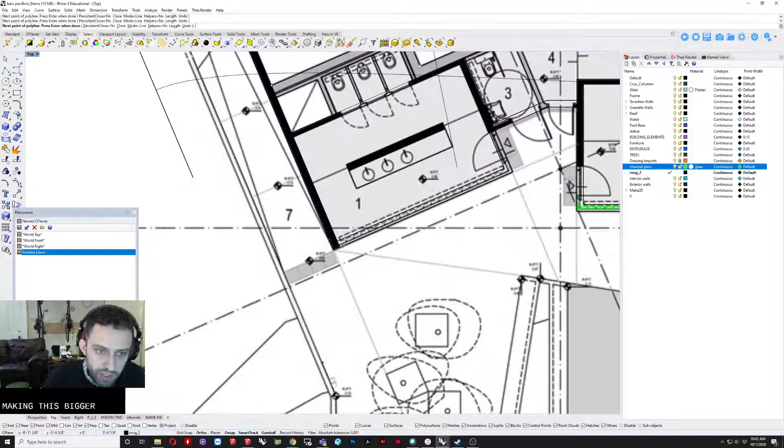You can see here my axes weren't perfect, but that's okay. I'm actually just making this bigger real quick and not worrying too much, because I know it's not going to be cutting at that end.

So I fillet, radius 0. Fillet again, this guy and that curve. So now I think I have all the curves I need. I join—one closed curve, excellent.

So we'll go back to this view, extrude this guy up. It just needs to be taller than necessary and wants to start at the right height. So I'm cutting this out, so I'm actually going to go beneath the lowest part of the building.

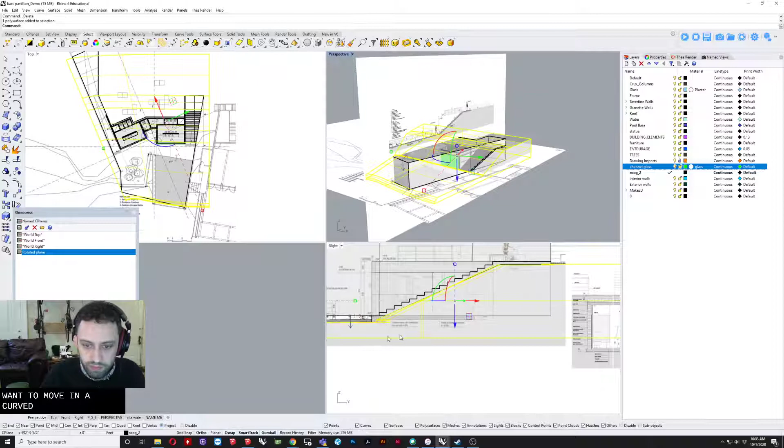It's better to cut out a little bit more. If I were being really particular, I might cut out this part less—actually I guess we'll do that, so we'll just align here. Oh, I was only moving the curve—I really wanted to be moving this box. So I'm going to move this guy down, align to the underside of the slab, and now I can do a Boolean.

And voila. Now the last thing I will need to do is I need to make that ramp. So you can see that this wall really does continue, even though it doesn't appear so in the 2D plan, but that's just because it's being cut weird. So I'm actually just going to do a move. Well, no, I'll leave it. I'll just draft that out real quick.

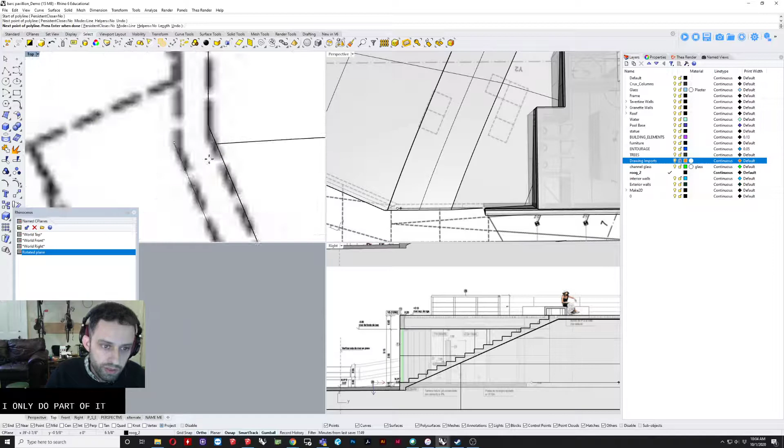Turn this back on. And on the rotated axes. I'll only do part of it. So using the move face command to just extend this guy, deselect what I didn't want.

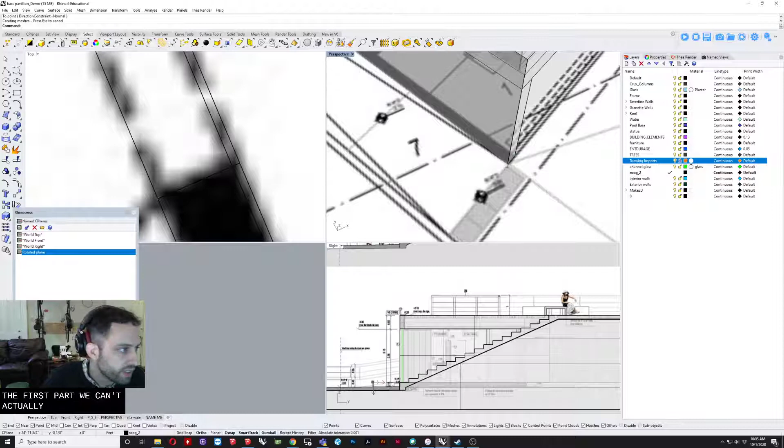For this project, you don't have to build the entire ramp, just build the first part. I don't think there's a section that's cutting through the ramp. There's not, so we can't actually get an idea of exactly what the slope is. So what's the best way of doing that? The ramp appears to start here. So I'm just going to do an approximation.

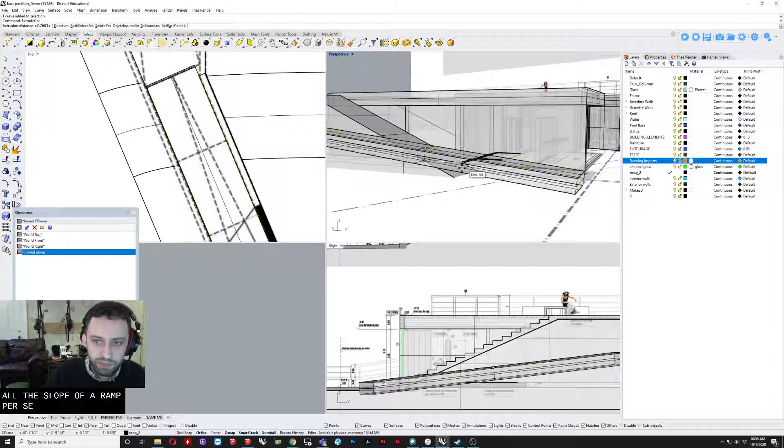I am on my rotated plane, snap, and I'll go to this end. So I did not have project on, that's why it was up in the air like that. And I'm just going to, again, it doesn't really matter too much. That's not at all the slope of a ramp per se, but it'll be close enough.

Nice little ramp there. The last thing I'd want to do is just draw the outside surface, and I suppose the railing that goes with it, which would just be following this curve. Now, these are on different axes, which does make it a little bit more challenging, but I'm not going to be super precise, as I've said several times now. And I can almost call this guy done.

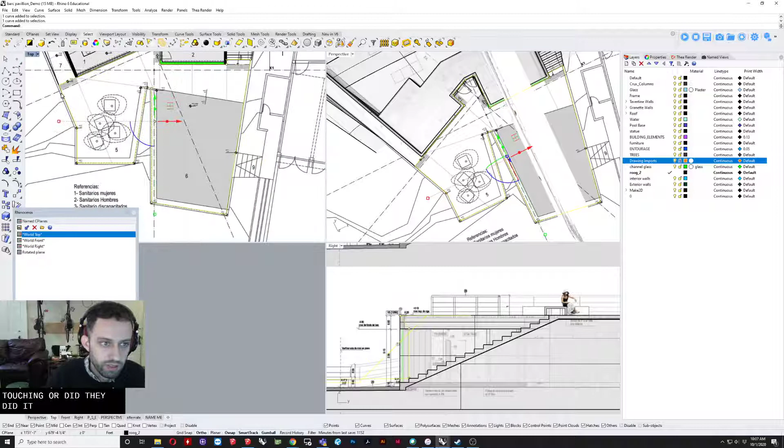So those lines, looks like these curves didn't actually end up touching. Or did they? They did. One closed curve. Excellent. Ooh, so occasionally this will happen where you forgot to turn on the planar, so you end up with this. I don't really want to redraw that, so I'm just going to go to my top view and type in Make2D and just make sure that view is set on, or as long as you're in top view, it doesn't actually matter. But basically, it will just copy that line down, so we can now have a flat version.

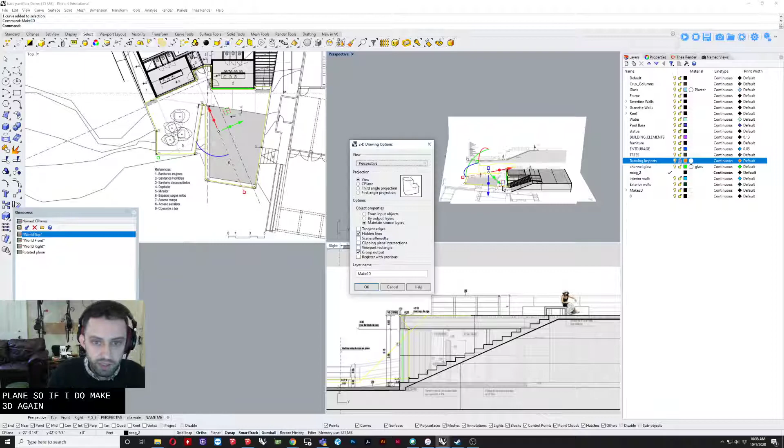Although it copied it. I'm actually going to do that one more time. So there actually is a reason to make sure that when you're doing this, you have it set to C-plane. So if we do Make2D again, and this time set to C-plane, it'll just copy straight down as opposed to moving it to the origin. So now I can delete that, and I can make an extrusion of this. So now it will extrude because it's planar.

And I'll just take it. You can see it's a little bit lower, so I will pull it down. That is also a sloping surface. I'm not going to worry about the slope, and I don't think you need to either, because it's pretty subtly sloping, so this will be close enough. Okay, we are 99.5% the way there.

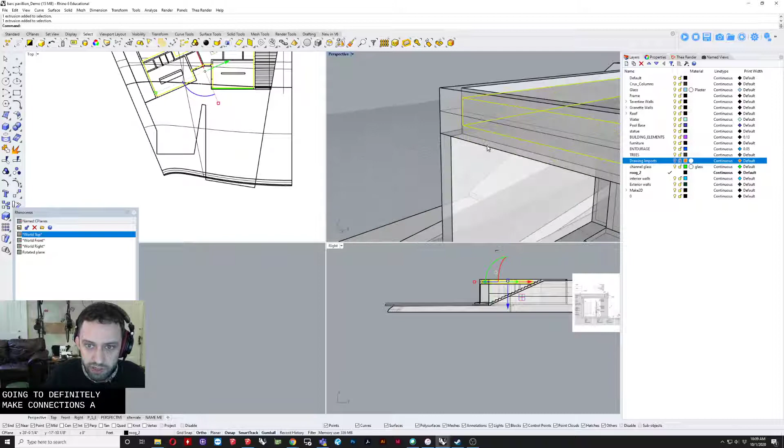You can see here, it looks like I did accidentally get rid of my floor at one point. So I'm just going to copy my ceiling down because my ceiling was pretty much my floor. I may have to make some adjustments because it's going to definitely make connections a little bit differently. Why is it I can't select it? There it is. Copy and then set axes to vertical.

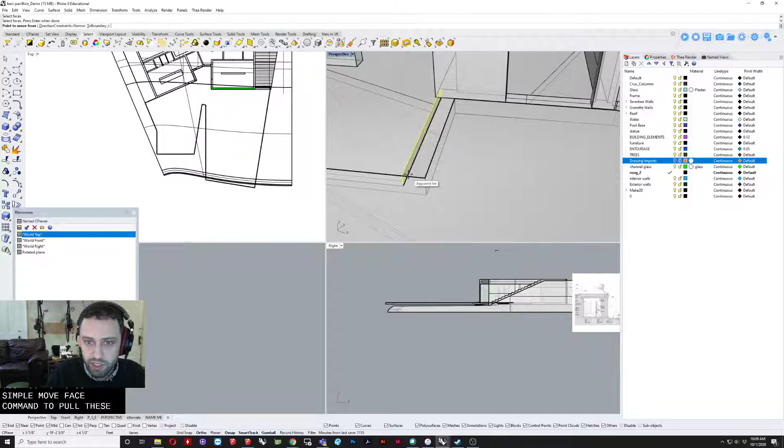So I'm just going to align these things. I know it's not exactly perfect because there is some slope change happening here, but this would be close enough. So you can see that my interior surface doesn't exactly meet my exterior surface, so I'm just going to use the simple move face command to pull these together so that I can have a continuous surface so people wouldn't fall into a crack.

Okay, so, I skipped a few things. I want to put this over here. I would want to model a door and stuff, but those are fairly simple. I would probably want to do the sort of railing that's going along this, but I would just sort of draft that out as a 2D extrusion and just extrude up. But I think this covers now 95% of what you need for this project.